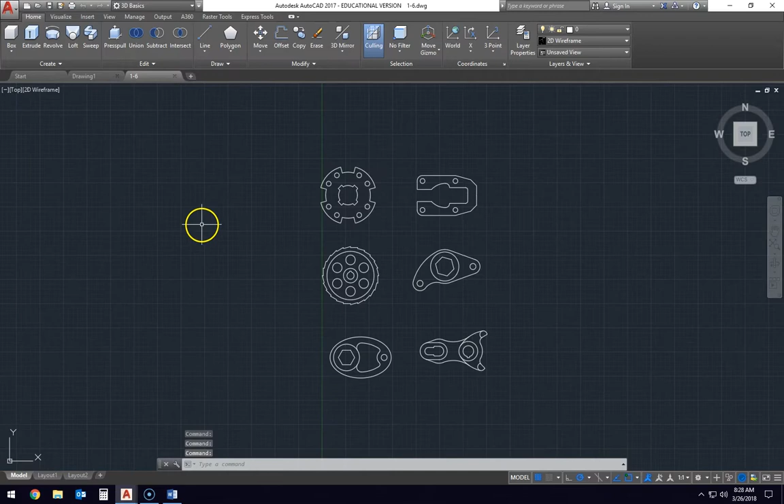I thought that we would start with what my students start with here, which is the first 6 drawings that I've shown you how to draw already. There's videos on my channel on how to draw each one of these step by step. I thought I would show you how to take these drawings and make them 3-dimensional.

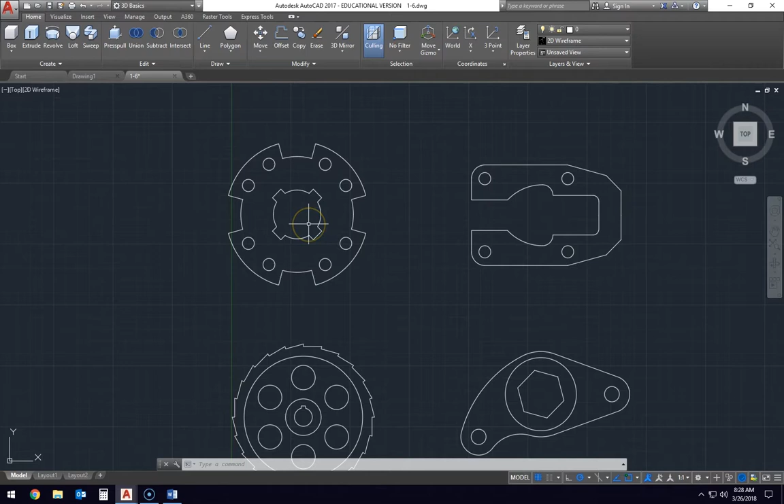The first thing I'm going to show you is also how to move around the page. What I'm doing to zoom in and zoom out is use my mouse wheel, and if I click on the mouse wheel, push it down and move, I can pan. If I hold the Shift key while panning, clicking down on the mouse wheel, that allows me to orbit. This is going to be really important when you are starting to draw in 3 dimensions.

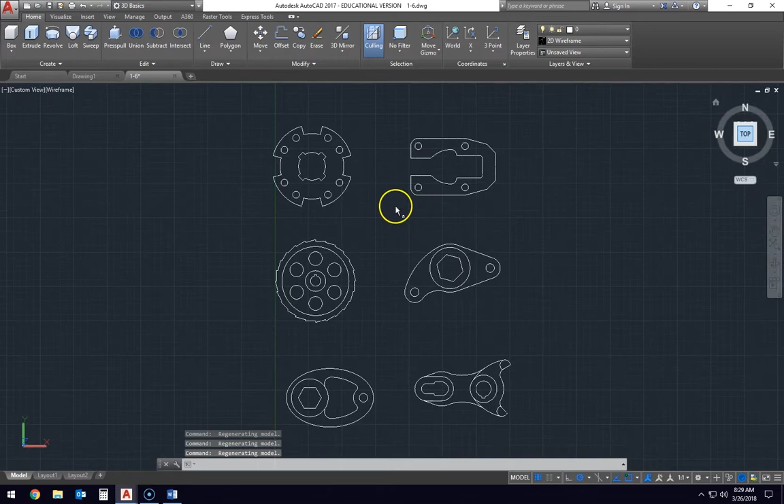You can still use the View cube over here, and click on corners to see things that line up on exact lines here. We can say just look straight top down, or use this to rotate around sideways. But I find that using that Shift key with the pan, every once in a while you just need to get into a little spot, and it's easier to move around like this.

If we take a look at this first drawing up here, this is the friction plate, and I have an additional information drawing here that I use to show my students what needs to happen. So this drawing number 1, friction plate, I'm going to make the thickness of this 1/2 inch. So we'll go back to the drawing.

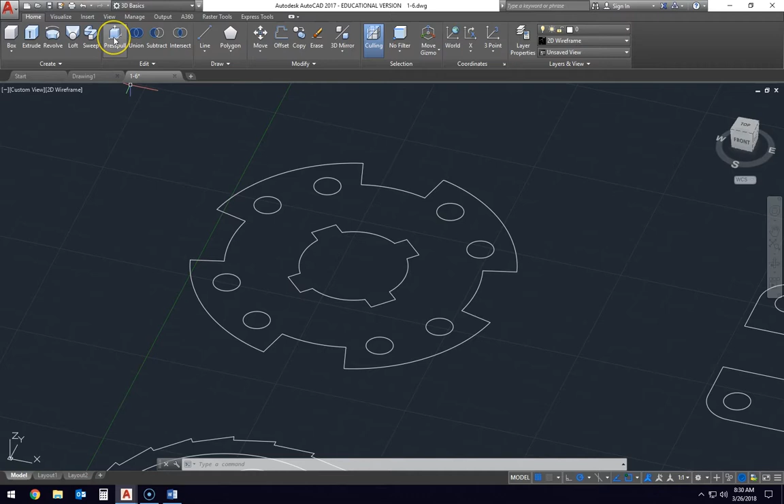The first tool that we're going to use is going to be the Press Pull tool. If you already have a 2D drawing, or if you already have lines drawn, the Press Pull is a really good option to make a 3-dimensional object out of those lines.

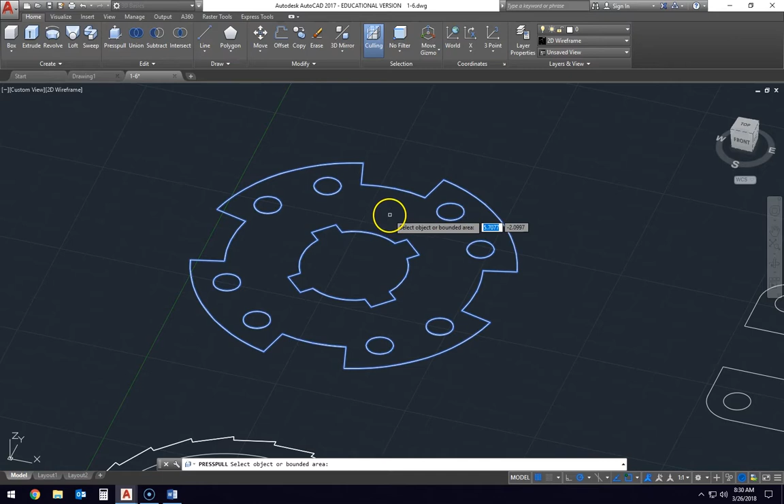So I'll grab that tool, and hover in the middle of this friction plate, on the part that I want to extrude up. If I just hover in the very center of it, it's going to make this a 3-dimensional object, and it's going to forget everything about out here. So I need to hover in the middle of this thing, click once, and it drags that part up, and I'm just going to specify the extrusion height to be 0.5, or 1/2 inch, and there you go. That's it.

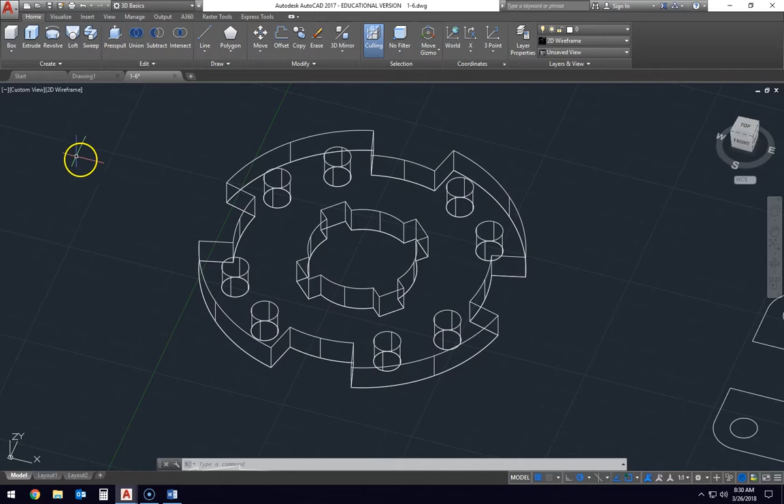Now this line drawing is also this wireframe. It's sometimes a little difficult to see, to make out what exactly is 3 dimensions and where it starts and stops. So I find that coming up here to the 2D wireframe and changing this down to either realistic, or I prefer shades of gray when you're doing some of these early drawings, just to be able to see what those objects look like in 3D makes it a little bit more sense.

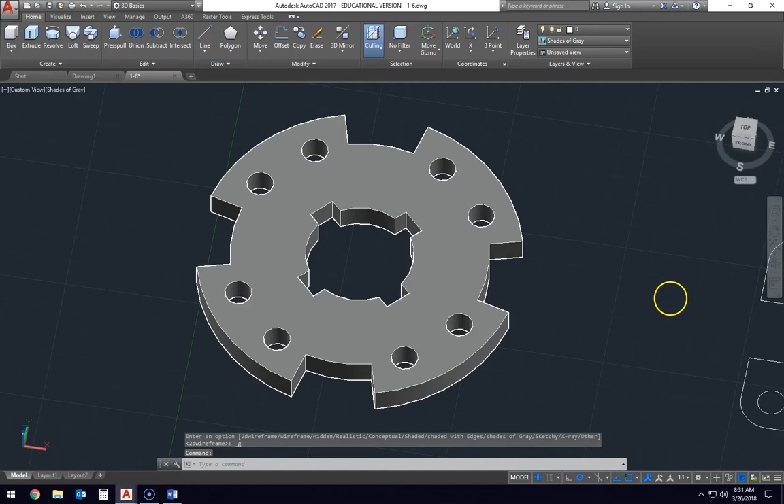So there's the first drawing. I'd be completely done with that one. This one is the same deal. If I go onto here, I have the thickness as to 3/4 inch. So I'll just use the Press Pull tool again, come into the area that is the solid block area, and then say 0.75. That's my area there.

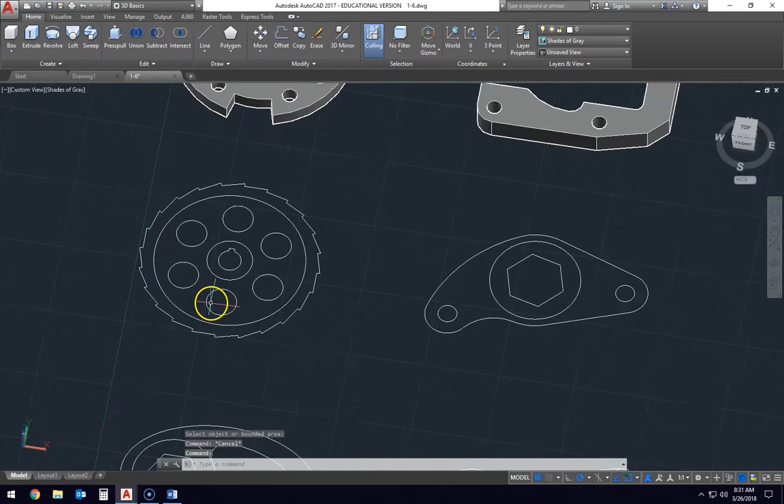Now when I come onto this one, it has a bunch of different parts to it. It has the outer section here, it has an inner section like a webbing, and then it has like a center hub.

So what I go with on this one is that the center post is 2 inches thick, meaning that it's centered across that 2 inches. The thickness of the outer part here, the webbing, is 1/2 inch, and the outer rim total is 1 inch thick, and that's also centered on the width.

So we can do this a couple of different ways. Just like everything that you do in AutoCAD, there's usually about 2 or 3 different ways to approach it. So here's how I'm going to do this.

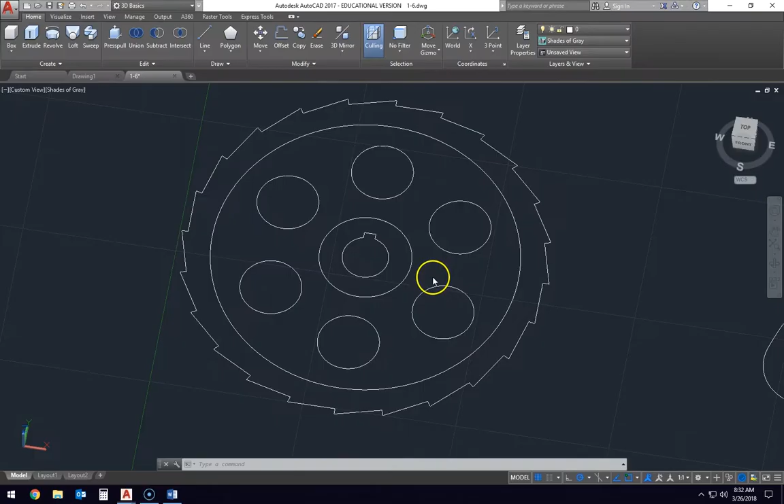First is this center hub in here in the middle. Press pull. I'm going to assume that whatever is in the 0 flat on the Z layer here, the Z height, I'm going to assume that that's the center of this drawing. So the center section needs to be 2 inches thick, like the center post needs to be 2 inches thick total.

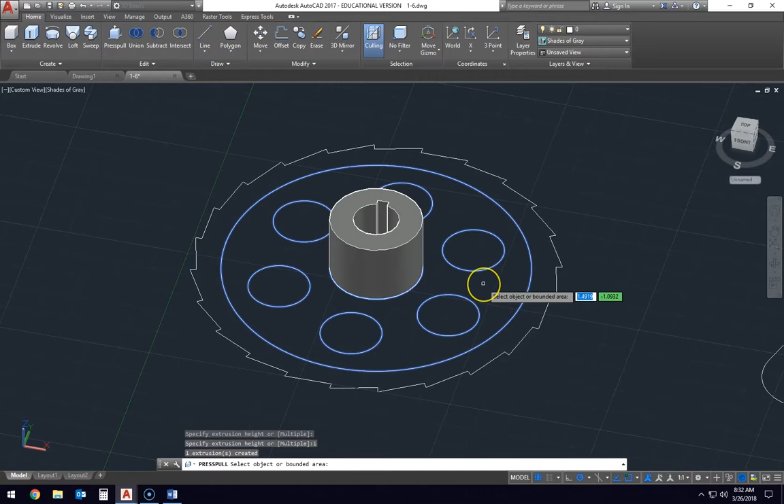So I'm going to take this and come up 1 inch. And then the outer thickness needs to be a 1/2 inch, so I can take this part and come up a 1/2 inch, half of that, which would be 0.25. And then this outer section out here needs to come up as well, and that part needs to be 1 inch thick total, so I'm going to come up 1/2 inch on that side.

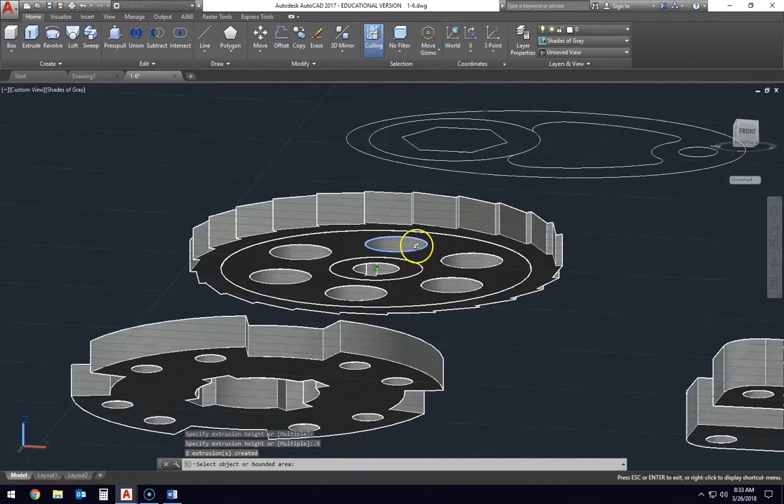Then, because this is half of the drawing here, because we still have our lines on the 0 Z layer, now we can take this, we'll take the center part here, and we'll press pull that down another 1 inch. We'll press pull this center section down a 1/4 inch, 0.25.

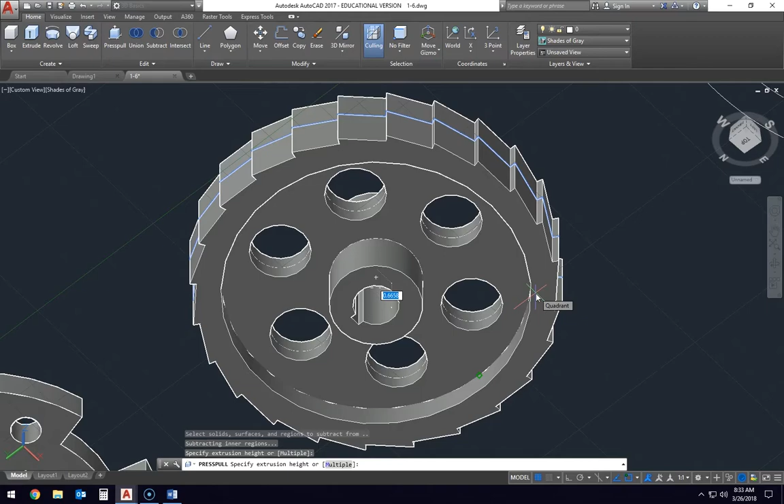And we will take the outer rim here and bring this down, and that's going to be 1 inch total, which means it's a 1/2 inch here. So that 1/2 inch, now this thing on the outside, if I take a look at this whole thing...

Even though there's a line going through the middle, because we use the press pull tool, this is one solid object. This whole outer rim is one solid object. It's not 2 objects up and down. Even though I did press pull from 2 directions, these are 2 solid objects here, this part here, and then there's a 3rd section here in the middle.

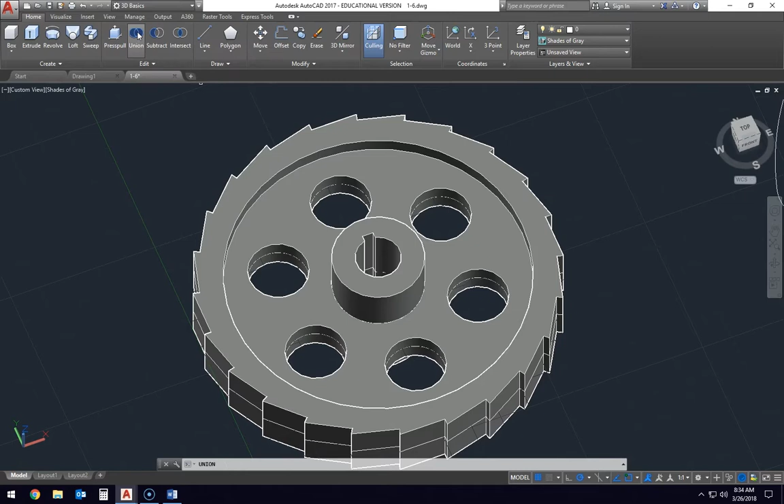So just to finish this piece off, I'm going to make this all one piece, and we're going to use the union to do that. It just combines selected 3D objects. So we're going to select all 3 pieces that we want to union together, hit the Enter key, and now when I hover over top of this thing, it is all one piece.

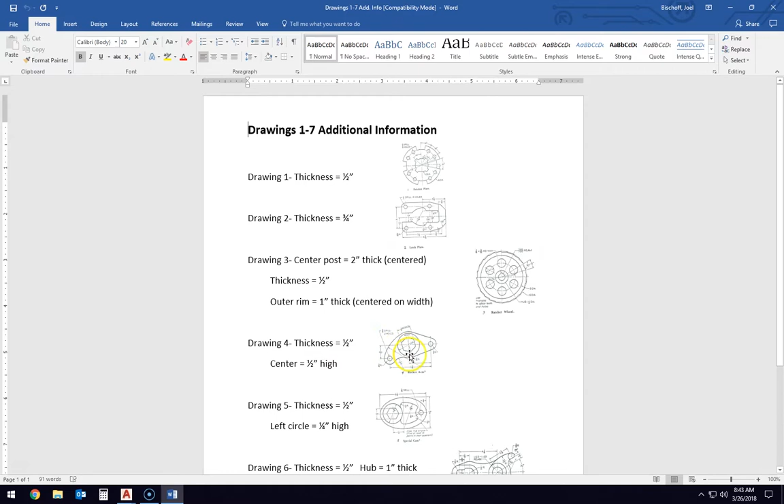Okay, so the next one we're going to do is the rocker arm. The rocker arm is another simple one. It just is going to have 2 different thicknesses here. It's going to have the thickness of the main body part, and then the center part in the middle there with the hexagonal piece is going to be a 1/2 inch high, like a 1/2 inch off the thickness.

So we're just going to go to press pull. We're going to lift up the entire outside shape here to 1/2 inch, and then we're going to come into the center section. We're going to lift this up to 1 inch. That's it. That's that piece.

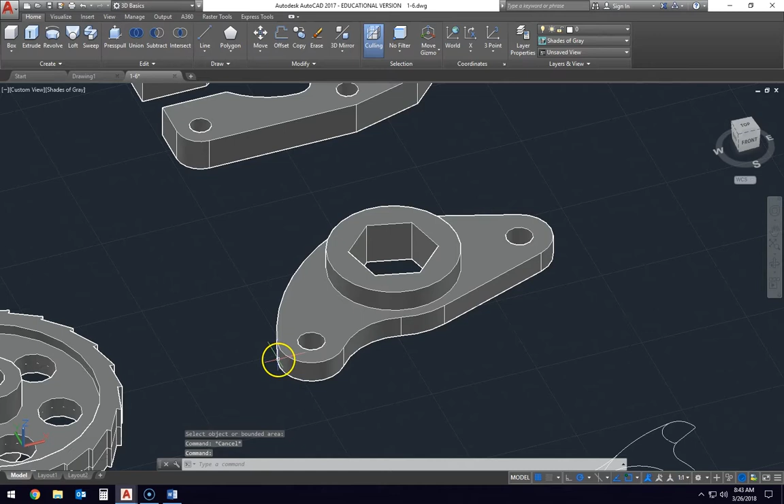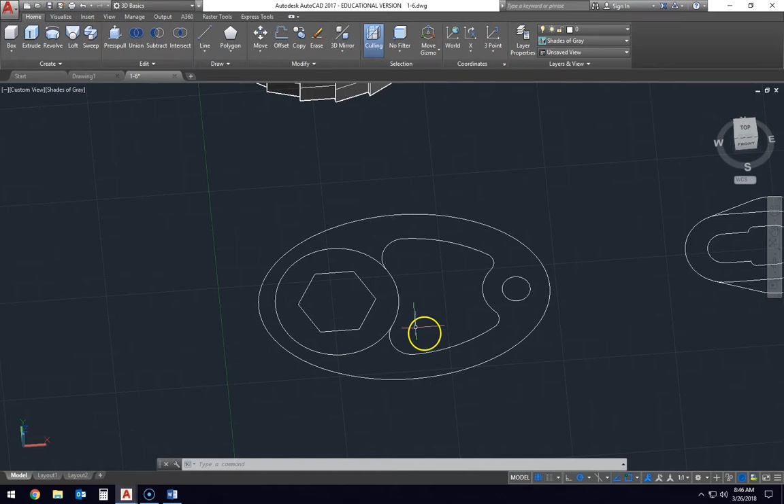Now, this one over here, this one causes some problems. I'm not sure why it is that this happens, but for whatever reason, we're looking for the 1/2 inch thickness on the main body of the part, and then the left circle to be a 1/4 inch high. But when we go back to the drawing, it has the oval shape on the outside and this circular shape on the left side. When I go to Presspull and I try and select the outside of the object here, basically what happens is the entire thing comes up. There's no stopping it. It's just the entire oval, and I'm not exactly sure why that happens.

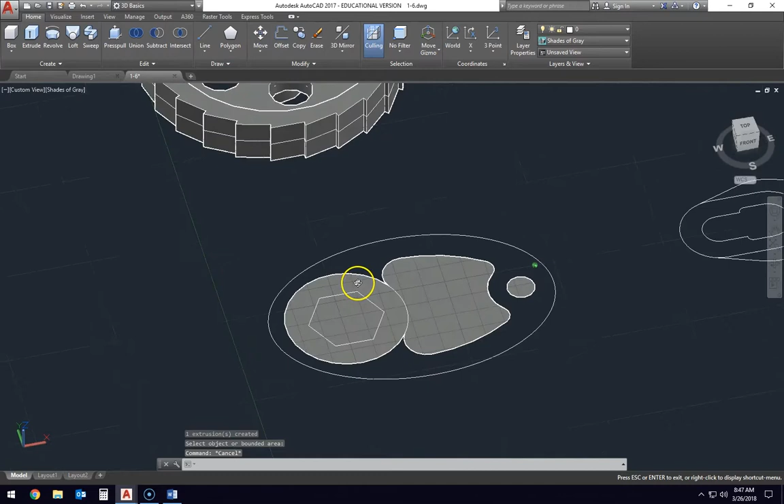So I've come up with a sort of a workaround, and that is that what I'm going to do is extrude up the 3 different objects that we would need to subtract out of the middle. So watch what I mean here. I'm going to grab Presspull. I'm going to take this small circle here, which is going to be a hole, and I'm going to take that way up high, 5 inches high.

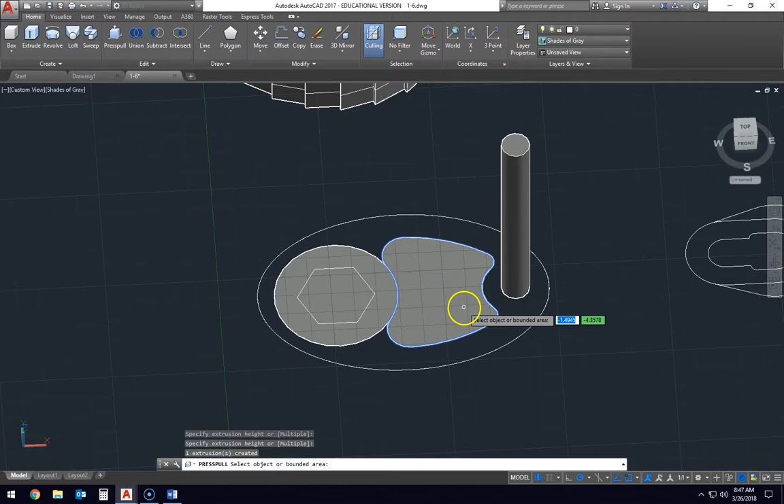That's fine. I'm going to take this center part here that has the curves on either side. I'm going to bring that up 5 inches high or so. And then the last part is going to be this hexagon. I'm going to drag that way up high. Those are much, much higher than they need to be.

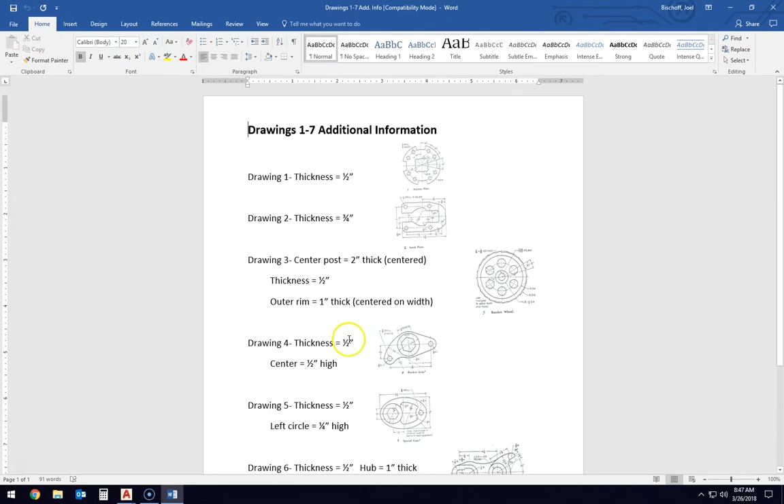Now, the outer thickness of this needs to be a 1/2 inch. The left circle is going to be a 1/4 inch higher than that. So if I drag this piece up to 3/4 inch, 0.75, and I drag the rest of this thing up to be 0.5... oops, select object.

Drag the outside of this thing here up to be 0.5. That gives me the 2 layers that I actually need, the 1/4 of an inch higher and the 1/2 inch right here. Now we still have these big pieces sticking out of the end here, and this is a good way for us to use the subtract tool.

Subtract is going to be taking pieces away, and what you have to do is select the thing that you want to subtract out of first. So I'll select this object first, then hit enter, and then subtract the surface or object that you want to take away, and that would be this thing. I hit enter again, and it takes that whole thing out.

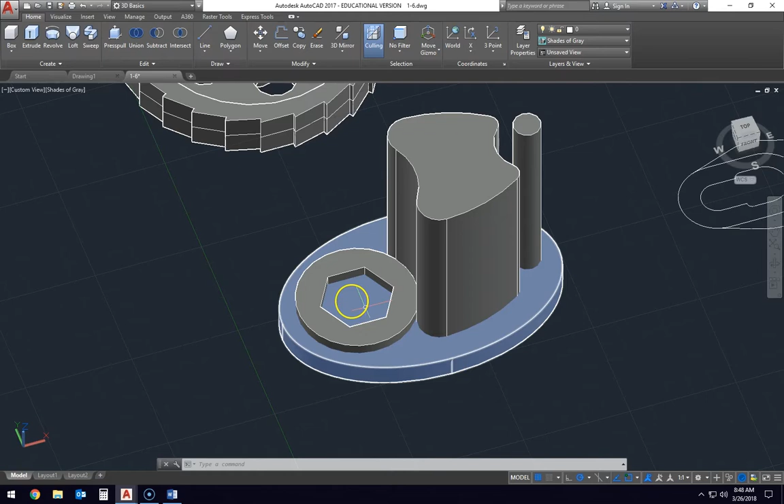Now, because I only had this center part, what I actually need to do is select the circle itself and the oval. So I'm going to undo what I just did there, and now I'm going to go subtract again. I'm going to grab this object and this object, hit enter, and now select that in the middle.

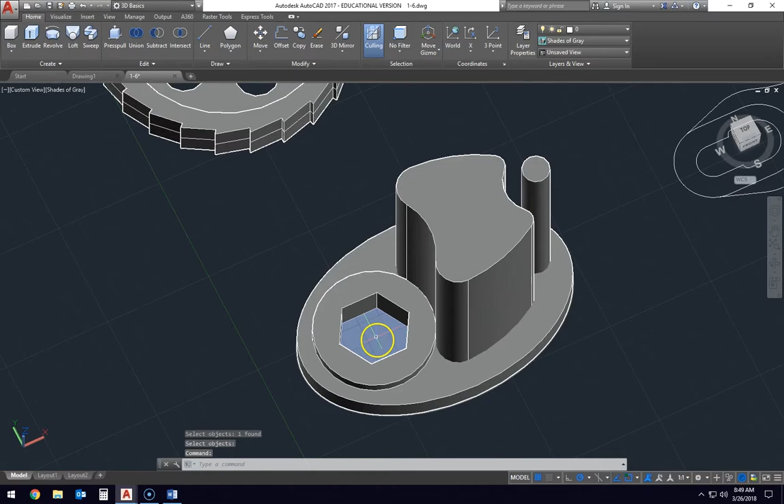What you see is that, other than that weird flat line down here that doesn't really exist, that's this piece, that whole thing punched the whole way through.

Okay, we'll do the same thing with these 2 pieces. We'll take the subtract, take the first object as the thing we want to subtract out of, hit enter, subtract this piece and this piece, hit enter.

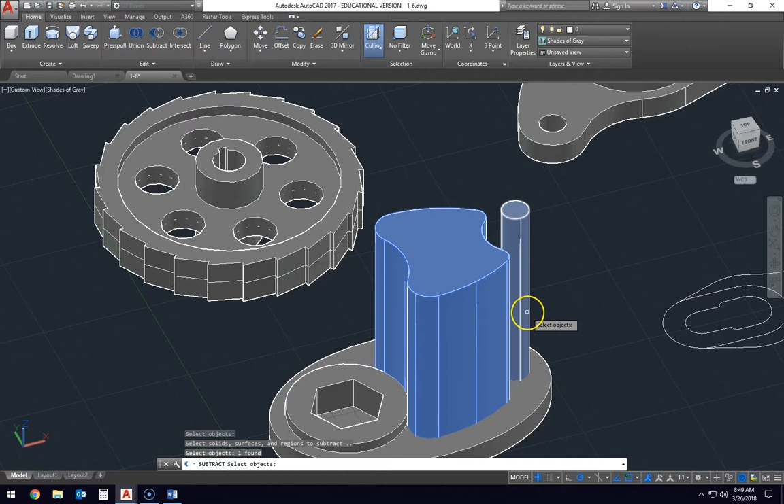Okay, that's it. So this piece down here somehow is a region, but it doesn't really exist. I'm not sure what it's clicking and what it's not, but because I tried to do the Presspull the first time, those things sort of exist there, but they don't really exist.

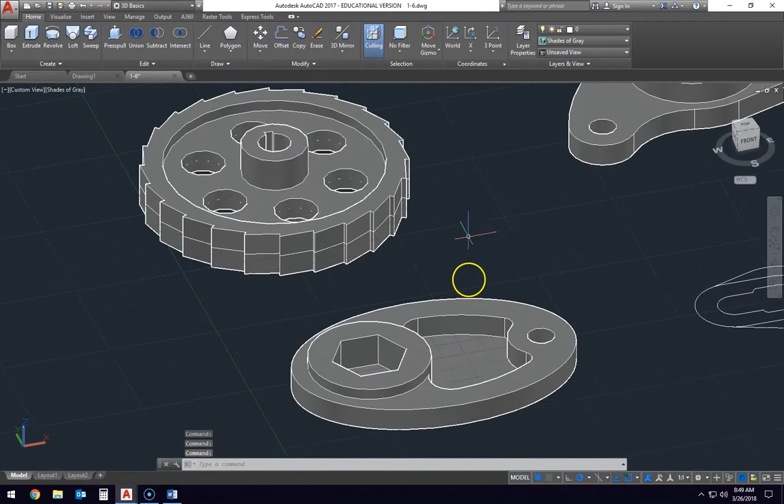So the last one over here is this piece, and this piece has a couple of different parts to it. The thickness is a 1/2 inch overall—that's this center section here. The hub, that's this part on the right, is 1 inch thick. That's going to be centered.

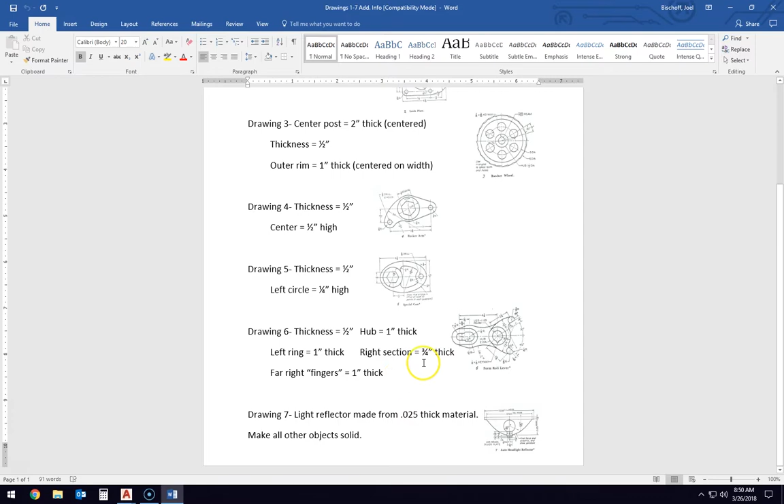The left ring, that's this piece over here, is going to be 1 inch thick and centered. Then the far right fingers, these little pieces up here, are going to be 1 inch thick as well. So we're going to have a bunch of different sections here, and we'll have to think about the thicknesses as we move along through them.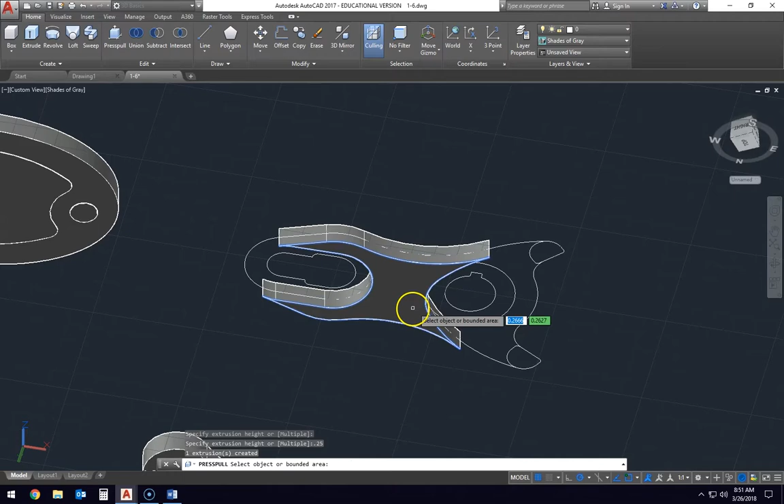The center section here, which we'll do all centered, is going to be a 1/2 inch thickness. So this part right here is going to be the 1/2 inch. If I want this to come up a 1/4 inch, 0.25, then press pull down out the bottom, take this down 0.25, and that'll be centered on the middle there.

The hub that's on the left side, left ring, that's going to be 1 inch thick. So we'll take this section here, come up a 1/2 inch, and we'll go down a 1/2 inch.

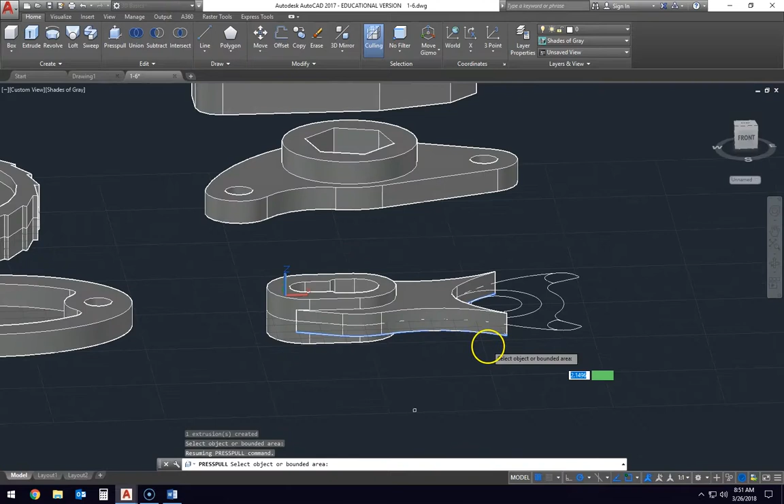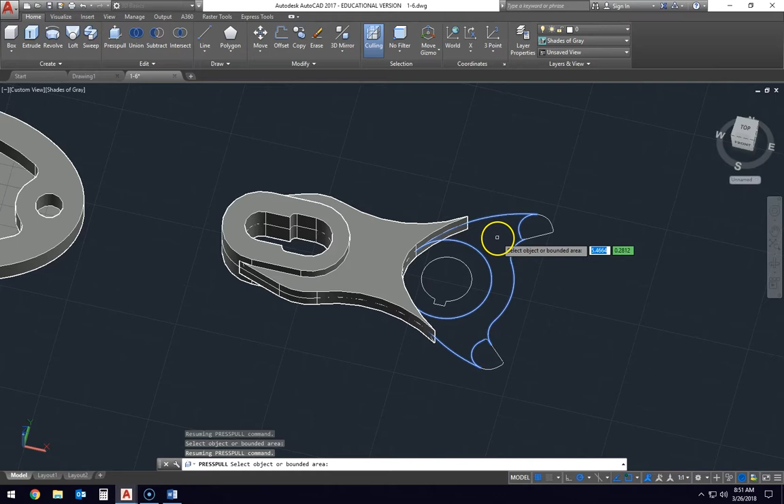Over here now, this right section is going to be 3/4. So in here, if that's 3/4, 1/2 of 0.75 is 0.375. So we'll come over here and put this to go up 0.375, and have it go down the same 0.375.

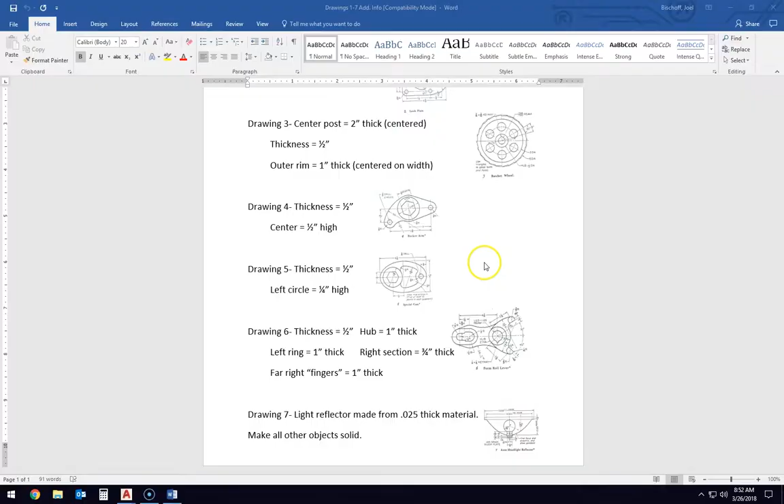The hub that's in the middle, that's going to be 1 inch thick. That's this part. So we'll come up 0.5, go down 0.5.

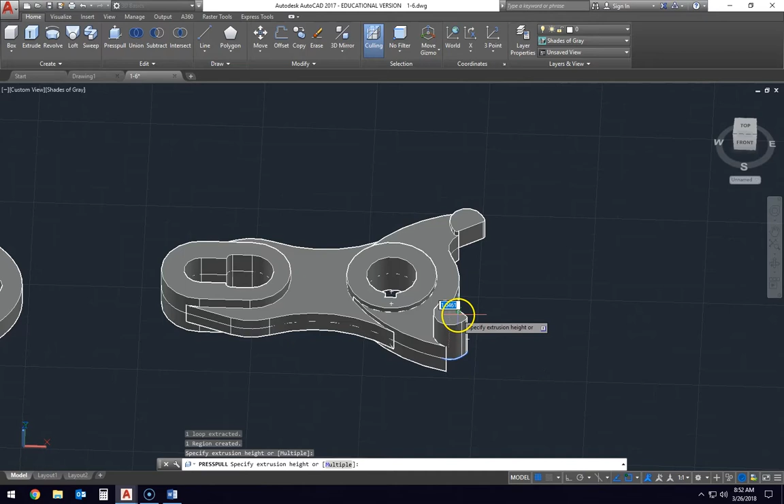And then the last bit are these fingers that are on top of here—this piece and this piece. Now because we're doing the same pieces, I guess we can't do them at the same time, but we'll do 0.5 this way, do 0.5 this way, and then rotate on underneath, come down 0.5, and come down 0.5 here.

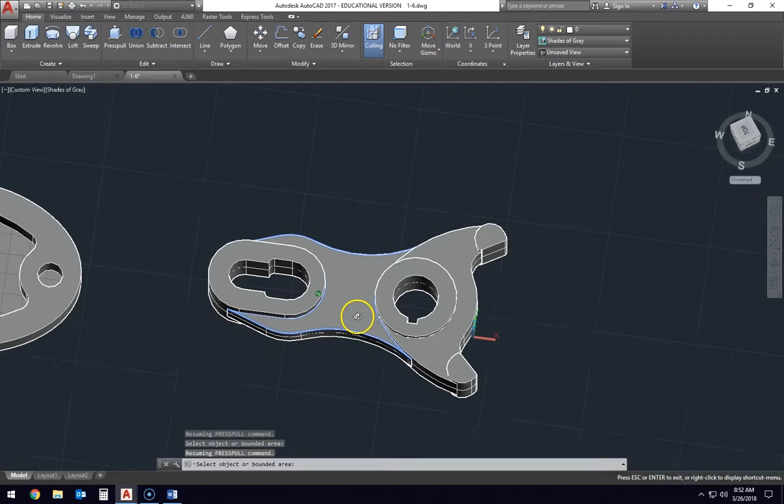Okay, now remember, this is not all the same piece, so a good idea now, after we have these things done, would be to union them together so that we know we could do things to them later, like put fillets in between or something like that if any of the drawings called for those things.

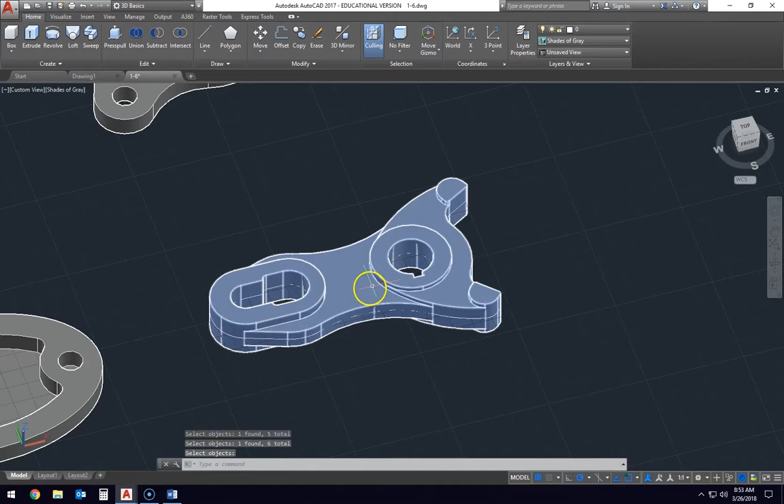So the last thing that I would do is grab the union. We'll just select all the objects that make this whole thing up, all the parts of the fingers, hit enter. Now that's all one big solid object.

So that's it. That's 3D modeling, the basics. I'm going to have some more videos coming up that go into a little bit more depth about how to use some of the other tools on the screen.